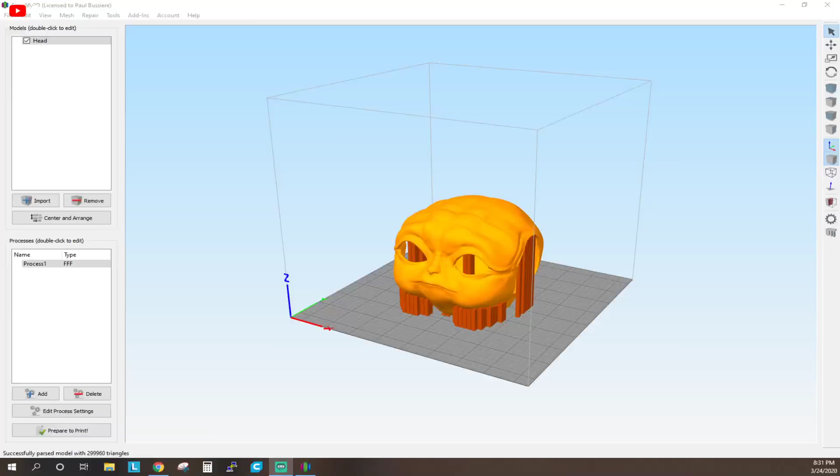Actually, thanks to the magic of my setup here, let me fire up Simplify3D, and I will show you exactly how I have my Baby Yoda set to print. All right, actually, it loaded right up. Okay, so let me go to the other screen here. Okay, there's Baby Yoda for the Ultimaker. And first thing you have to do, you've got to make sure to hit Control L and make sure this guy is flush with the bottom. Let me remove the supports. This way we're not cheating here and you see what I see.

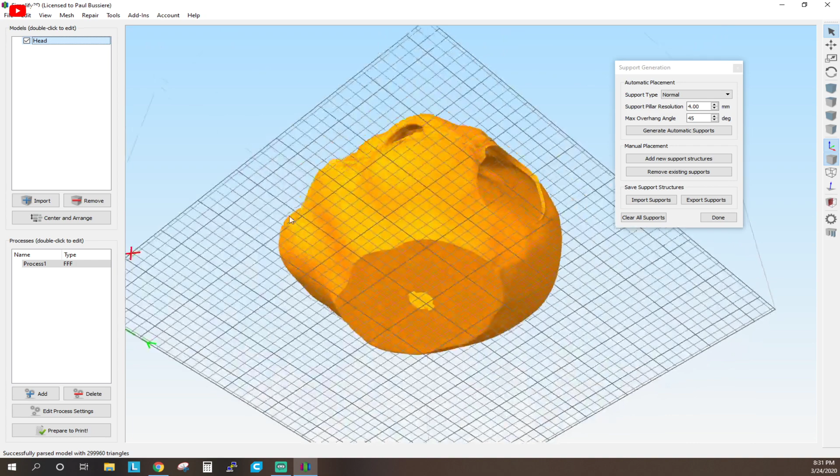Okay, so like I said, you hit Control L and you click this to make sure that this first surface is completely flat. Now it's very easy with this model, which by the way, if you go to Project 842, it's a Facebook group, you can click on the Dropbox and download these files. There's no money or what have you. If you wish to contribute to the designer, you can do so. I'll probably do so on payday.

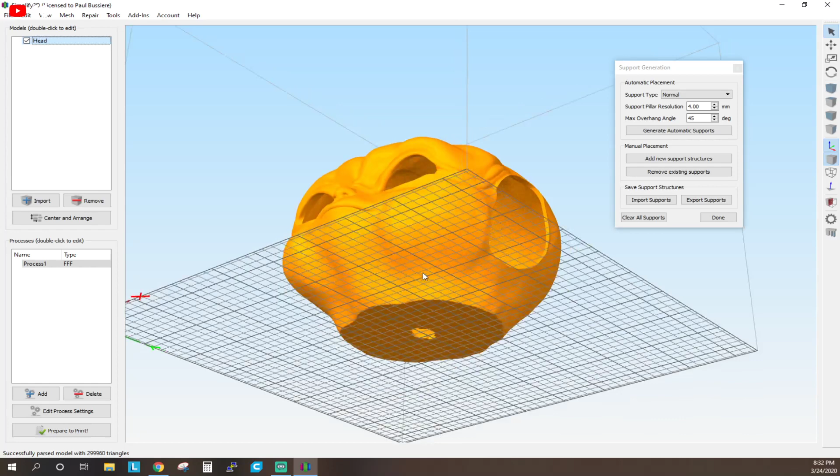But it's very easy to click. There's a few different spots on here where it's not perfectly flat. That happened to me on one of my first attempts. I kept noticing it was missing this big giant spot right here. So for whatever reason, if you click that level to bed right around here, it's not quite flush. Don't know why. Might even be worth dropping the Z a little bit just to make it perfectly flat.

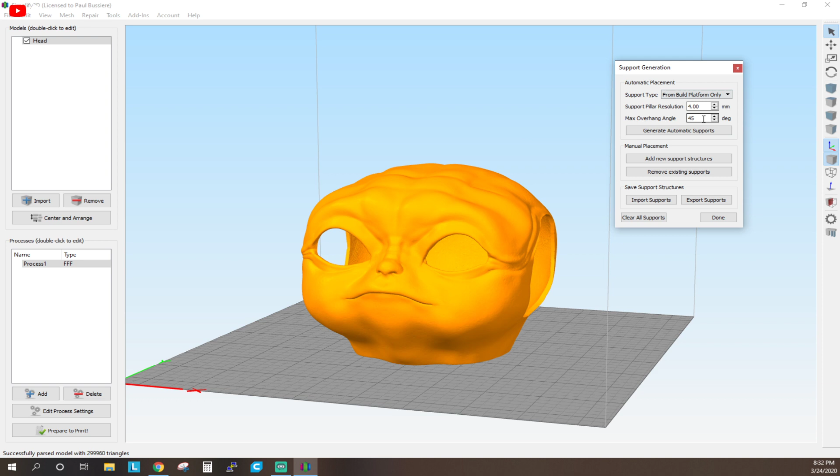So what I did is, I want to say it was from build platform only. I set it at 4mm. I don't like the thinner supports. It's really easy for the printer to knock those over. Max overhang 45, that's pretty much default. Generate automatic supports, and there it is.

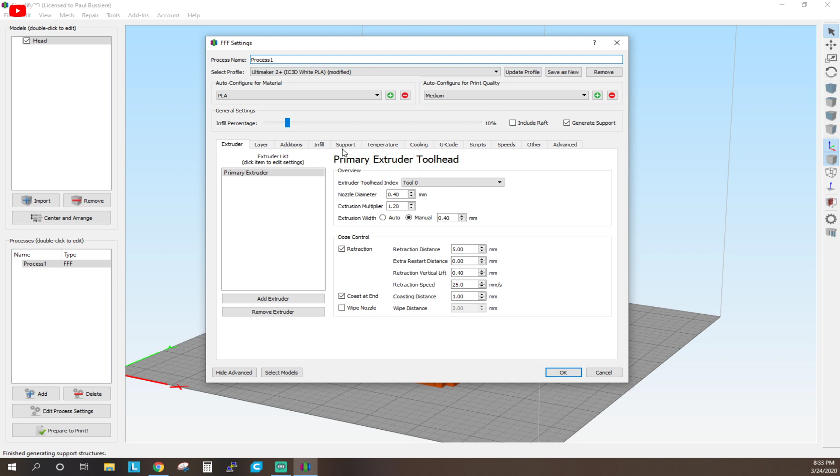And that right there, the other thing I would suggest to you if you're going to do this, and this is another gotcha that I learned the hard way. I got a trash can full of failed prints under support. The big thing you want to do is you want to make sure your support base layers are set to 2. Otherwise, if you don't have this set to anything, your supports aren't being held on by much more than that little zigzag or whatever you're using.

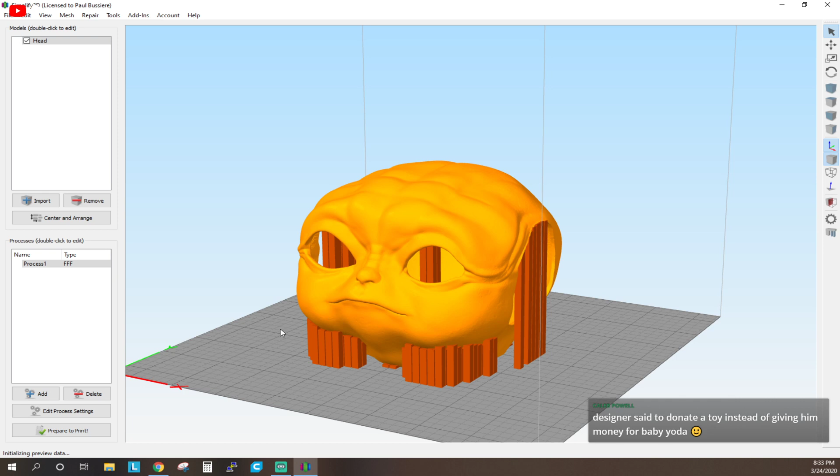And just to give you an idea what this is going to take to print, I have the print speed set to 51mm a second. And we're just waiting for the magic results. So right here it says about 13 hours, and that seems about accurate. It seems to be a little bit on the low side, but I want to say I started mine at about 9 o'clock. So yeah, we're getting there. So let me kick out of that.

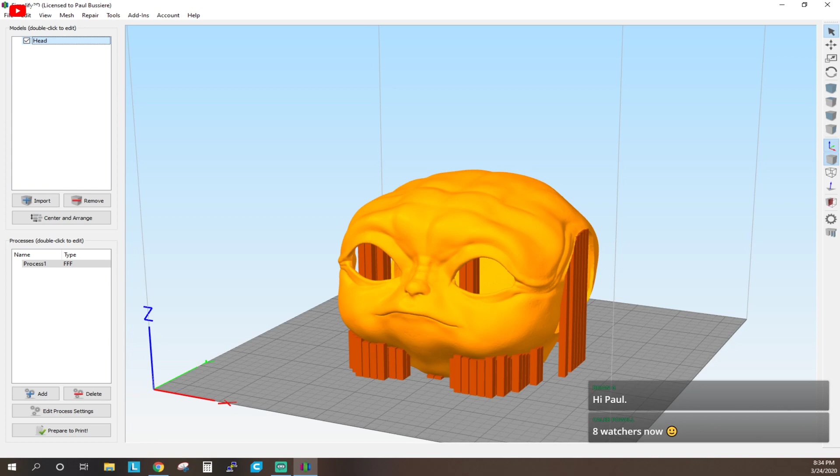Hello, Brian. So are there any questions on printing the Baby Yoda with minimal support? And like I said, as you can see, it worked out quite well. What's interesting is when you look at this skull, because I use this composite silk filament, you can probably see a little bit of the reflection even from the Canon camera, and let's see if the webcam wants to play nice.

There's a lot of interesting little artifacts it picks up. It's probably going to struggle with the focus here a little bit. The face looks pretty good. Yeah, the tool chest is in focus. Center back in. I think it's time to invest in another DSLR camera for camera number 2, and we'll get out of the league of web cameras. Alright, I'm going to leave him there.

Oh, that's okay. That's okay. I want to say we're up to 8, but no big deal. So that's the secret of Baby Yoda.

The FT6, as I mentioned, those extruders, for whatever reason, on the FT6, you had asked, and I think I gave a complete answer. They just keep on jamming, and those Bowden tubes, there's just too much. Not to mention, you're dealing with a huge bed, and you're dealing with a meter of 2 Bowden tubes because you have a 2-into-1 nozzle. Surprisingly, that hasn't clogged on me, and the prints I was getting on it were really quite good.

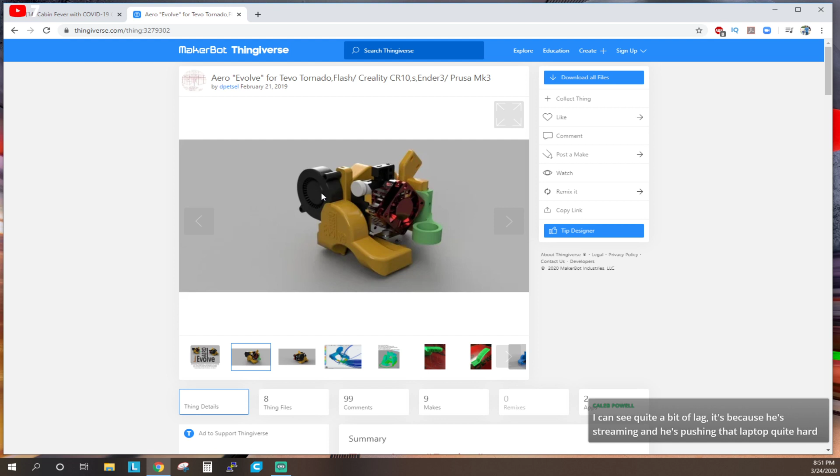Oh, you think it's a laptop being slow? I'm sorry. That's laptop. Well, let me find the task manager here. No, we're only at 40% CPU, so I don't know if that's exactly it.

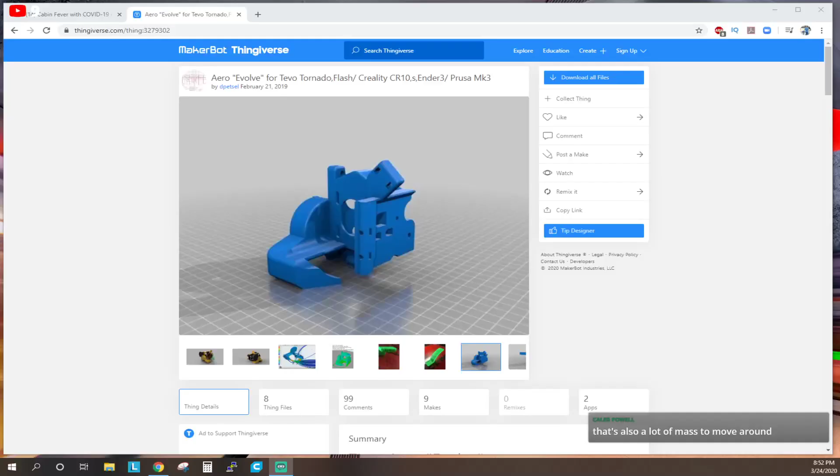So that is the Titan Aero Evolve, and I've had it for over a year on the CR10S, and if you can get the parts all together and printed, and again, let me go back here. Let me stretch that guy out. It's a challenge to get that to print. Obviously, you want to have supports from the ground up. Otherwise, you're going to wind up with supports inside your part cooling duct, and you'll never get them out.

Yeah, it could just be the internet. I noticed when I started the video, there was a significant amount of lag. From when I started the video to when you guys started to respond was several minutes. I have the gain turned up so you can hear me, but you're probably hearing my nose hairs ruffle through every breath. You can hear the printer for sure.

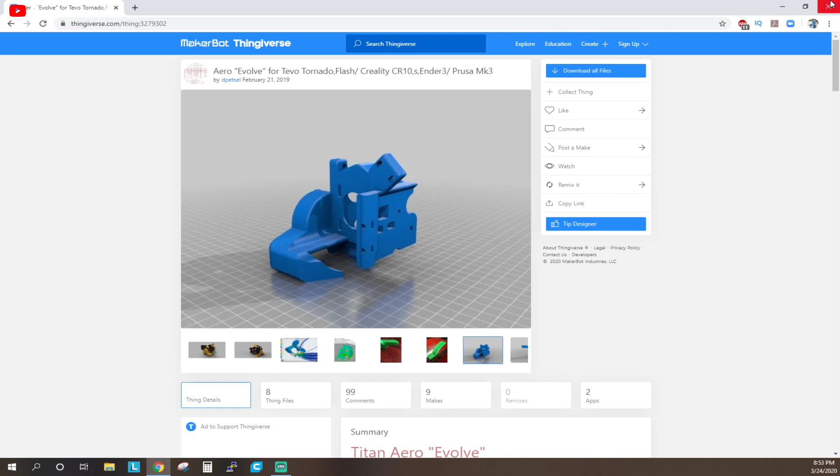So anyway, let's go back to here. So I printed one of those out for the Tornado. I have the 24 volt version of the Titan Aero sitting in a drawer. So I think perhaps tomorrow we will start on that. And yeah, I do have another Easy ABL kicking around here. This is one of the lazy ones where you just plug it in. It's not one of the direct wire ones. I'm lazy. I didn't want to do all that. So I'll put that back in the stack of stuff.

And I got a bunch of Raspberry Pis. I need to work on those too.

Well, I'm sorry if the internet is being wonky for some of you guys. That does kind of suck. So I don't know when we're going back to work. I keep on watching the news, and I keep on trying not to watch the news. The big thing that happened here locally, here in the state of Maine, the governor has basically said that only essential businesses can be open. So the gym is now closed, and a lot of other places of that sort. So prepare to gain 15 pounds, everybody.